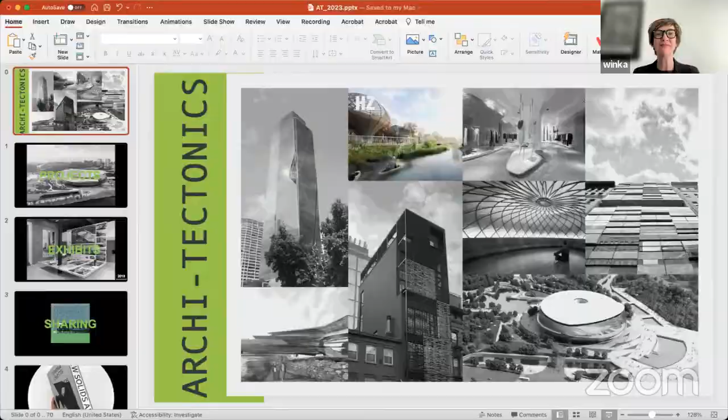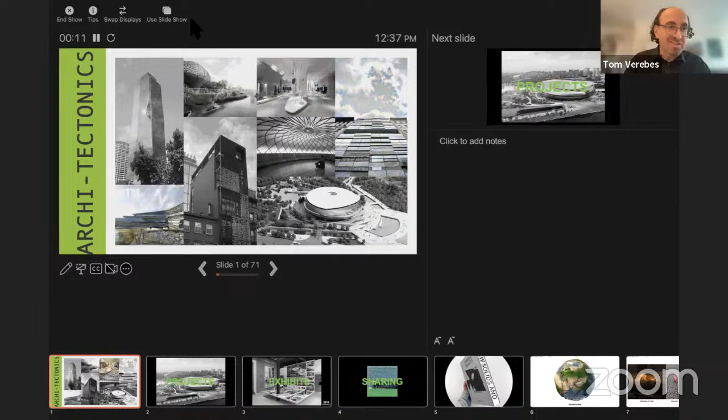My Zoom seems to think it cannot see my screen. I made you a co-host, Winka, so it shouldn't be an issue. No, it's just, I got an iWatch and it's ruling my life now, it's decided it's taking over. Let me know whether you see it full screen. Yes, we do. No, we see your notes. Probably swap displays, up on the left. Yes, okay good, thank you for that. Let me close this so I don't.

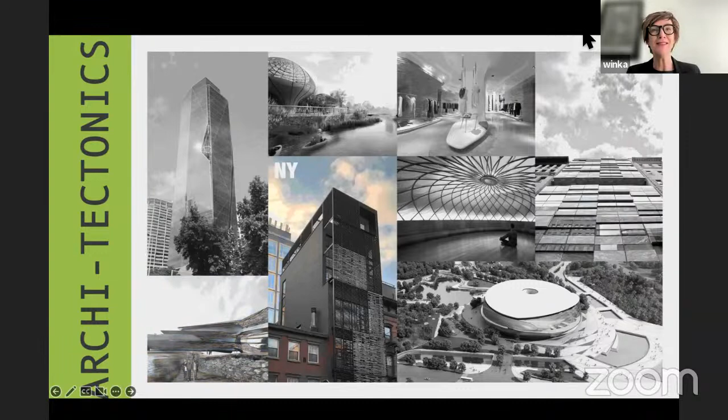Welcome, everyone. You all know offices are never just the person you see alone. There are many people involved, and over the years, many scales, many subjects, many typologies involved. As you see here, we move along scales, countries, typologies, and functions.

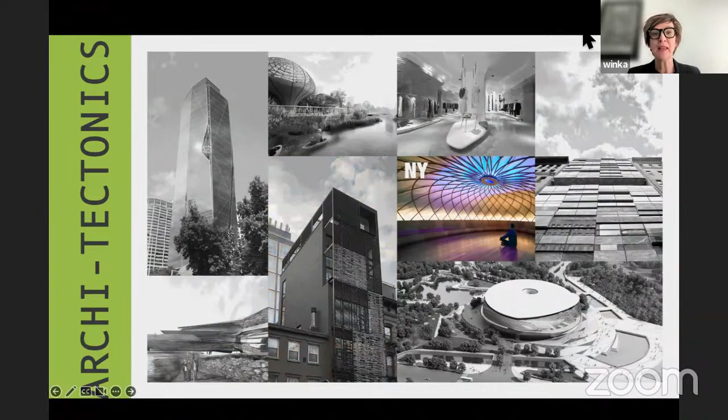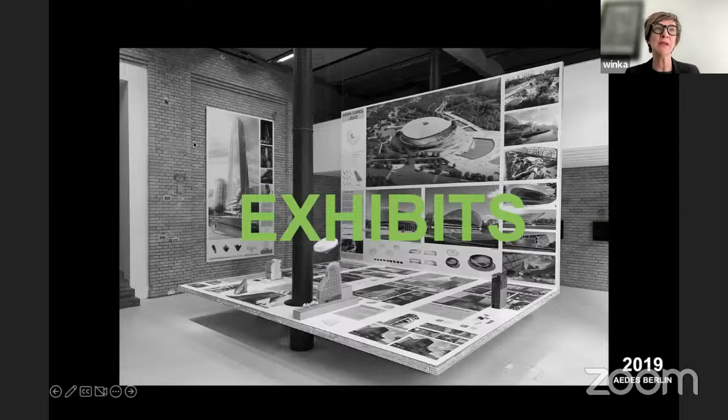Architects' lives are interesting. We go from projects to exhibitions, which means we share our ideas and we actually talk about them, make it an argument maybe.

And we share it in publications where we lay out our points and talk about it in depth. As Tom said, our latest book is Strange Objects, New Solids and Massive Things. We call it the anti-monograph. It really is a manual conceived itself as a strange object and reflects our non-standard.

Sorry, I was interrupted, but that was what I said. It is a manual, and it reflects the non-standard way we're working. Essentially, the non-standard way started very early on and was a little bit related to what we call the Anthropocene.

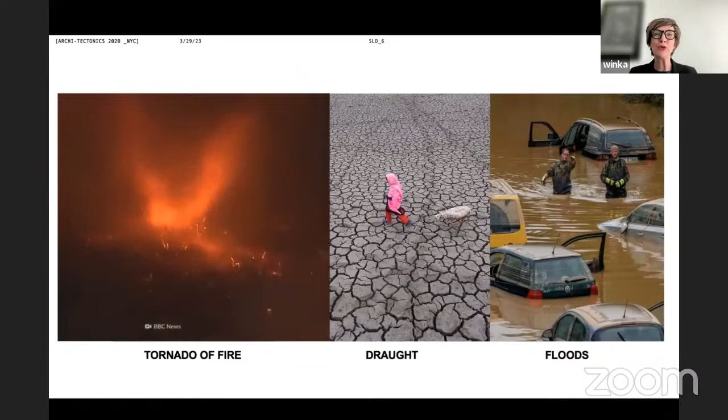The Anthropocene, as we know, has strange effects, from tornadoes of fire to droughts to floods. So why can't we control that this water travels to countries that need it and the other way around? We think partially as architects, we have a small part where we can maybe add some intelligence to this problem, thinking about buildings with smart skins, passive energy sources, prefabricating, which means it's clean and fast, and using renewable sources.

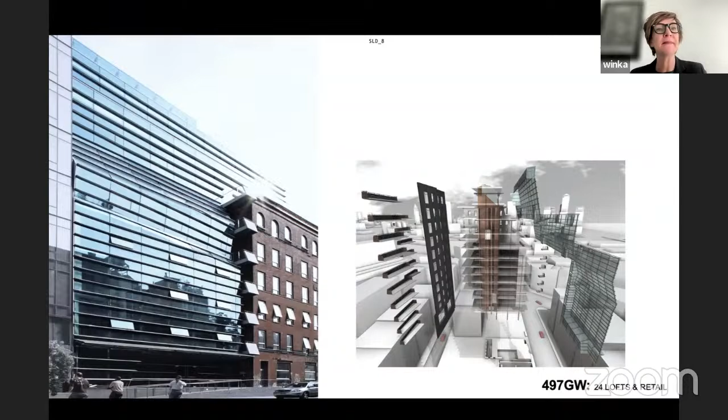So I'll walk very quickly through some earlier projects. This was a project we developed in the late 90s, built around 2000, and was maybe one of the first parametric projects where instead of construction drawings with dimensions, we sent a 3D model around with XYZ points. We did this because the glass was folded in Spain, the mullions extruded in Hong Kong, and the whole thing was unitized in Brooklyn.

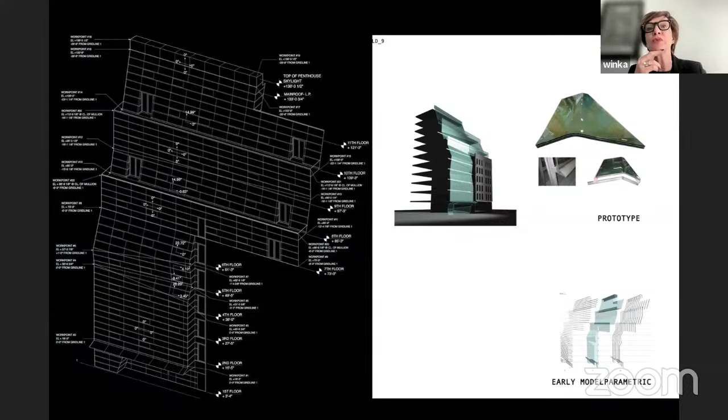Not only did we do that, we also felt like we wanted to challenge the original or standard curtain wall notion, as this was more a customized version. We separated the vertical and horizontal mullions in a way that on the outside, it doesn't look like grids, but like horizontal bands. This project was a very interesting one.

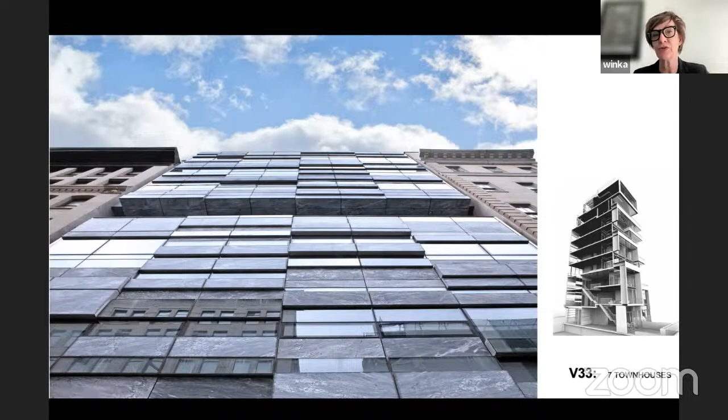And the last one was also passive solar. So this is a later one, moving into 2010. This was a pixelized facade, really responding to the fact that the building is in a landmark district, and it's stone, translucent stone, glass, and translucent glass, optimized towards the north street facade with glass and stone, and towards the south, where you have the garden with very deep balconies, which provide natural shading, and also outdoor spaces, which is rare in New York City.

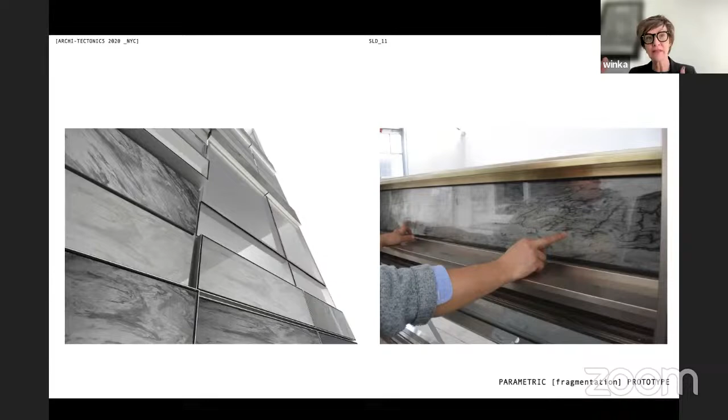This parametric facade started to show something which we have been doing from the beginning, also in the folded glass one, where we moved away from working directly with contractors. We started working directly with manufacturers, and that also meant instead of model making, we started to make one-to-one prototypes. So here we're looking at a one-to-one prototype of the facade in Italy, where the mullions are ultra thin, the stone is translucent, and the facade is a 3D pixelation. This was in response to a question of Landmark.

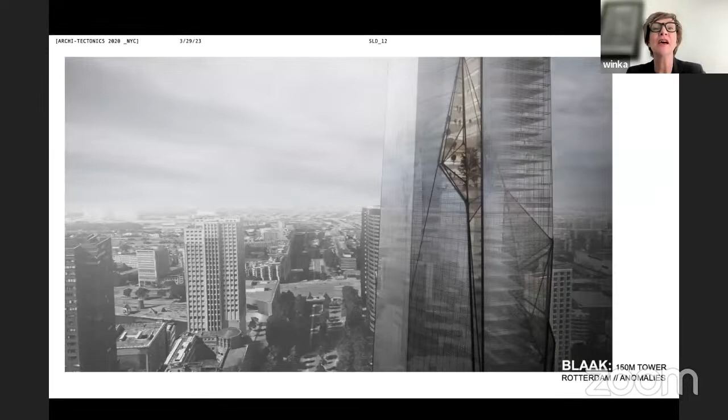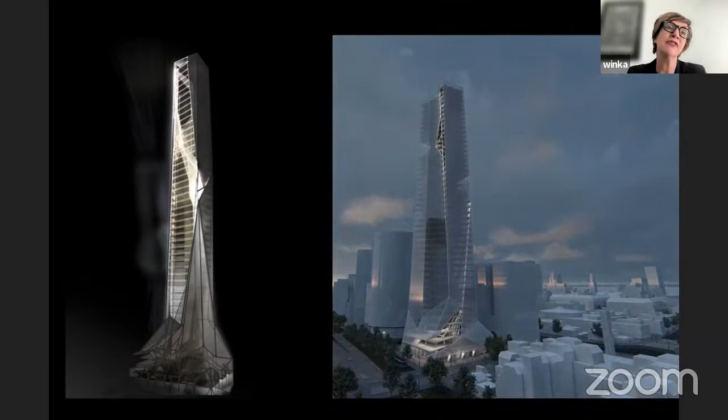Moving more towards the future, this is a tower we're working on right now in my hometown, Rotterdam, in Netherlands. A 150-meter tower, where we start to look at the idea of sky lobbies as green lungs. But not only that, the tower itself works like a solar chimney, pulling cool air at night from the lower levels and pushing hot air out. And then a frit will allow the south facades to stay cool, a silver frit on the glass, and the north facades to stay transparent.

So then we move into one we just finished, a little tiny guy. Here you can see the difference in scale that we happily embrace. Our office is not traditionally going from tiny to large, we actually like to switch the mini with the mega. And this is the mini and the mega I'll end with.

So this was actually a 4-story townhouse. We added 4 stories on top of it. I said to the office, this is starting to look very out of proportion. Maybe we need to add a 3rd building to create actually something completely new.

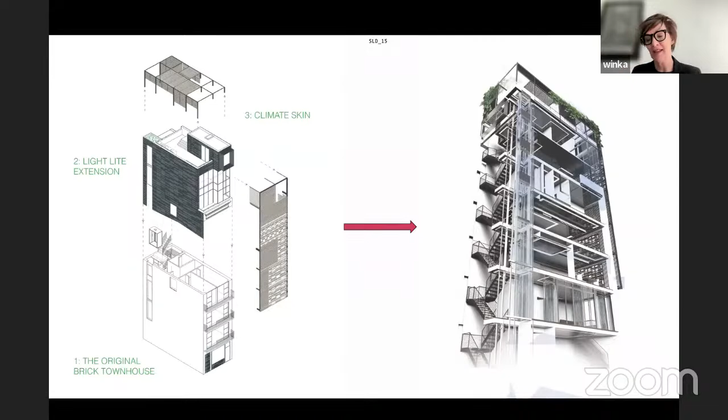This is where the climate skin came in, which is a trellis, a solar trellis volume really, not a facade but a volume, which wraps the front balconies that are leftovers from the fire escape that used to be there, and then wraps all the setbacks of the new extension and also the roof terrace and the back. In the back, as you can see on the right, is actually a glass elevator and stairs, because this 8-story townhouse is just for one family.

Here you see the front with the trellis, and that's on the right. You can see it's openable. And that opening we felt should be a transformation.

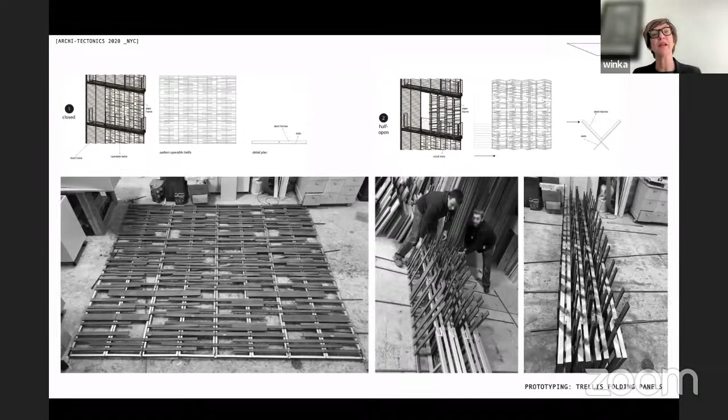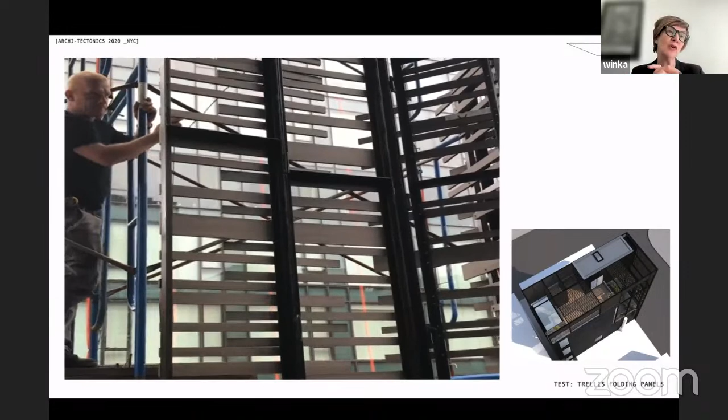So we call it feathering. It's basically inspired by a bird wing, where if the bird flies, the feathers are completely aligned and very streamlined, but then as it sits down or lands, the feathers get spread out. So we did the same thing here. As the trellis is closed, the fins move flat in space, but as it opens, it folds out. And here we're actually using an actuator to see whether we could automate the top levels.

Here you see a small close-up of how this looks for the facade, and you see the balconies. Quite beautiful is that this facade actually saves 45% energy reduction over the year, simply by opening the trellis in the winter and allowing passive solar in, and by closing it for shading in the summer and not overheating the building.

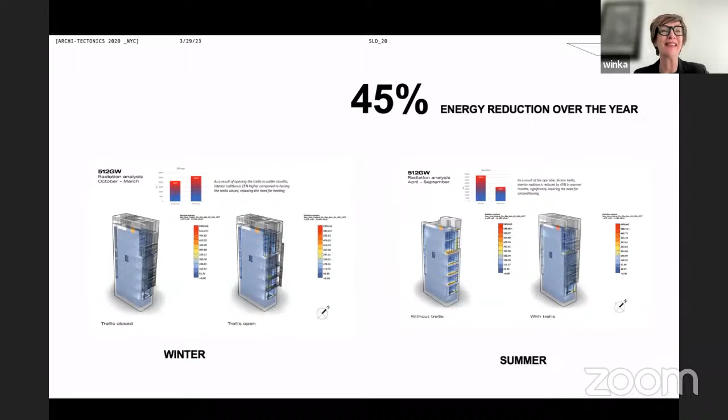A very energy efficient method, as in not using any energy. And then if we're up in the extension, you start to see the doubling of the facade.

So going back to the Anthropocene, when we look at the climate as it is now, nearly 50% of the US population, an estimated 150 million people, live in areas that don't meet federal air qualities. Particulate matter is single-handedly responsible for up to 30,000 premature deaths every year. According to the latest World Health Organization report, 8 million people die every year globally because of air pollution.

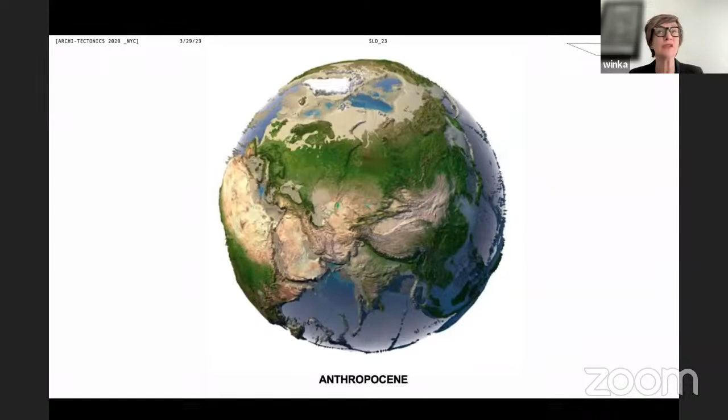Basically, radical mutants, or hopeful monsters, as they're called by geneticist Richard Goldschmidt, which he relates to evolutionary biology, means that these flowers undergo fasciation or cresting, a relatively rare condition of abnormal growth in vascular plants in which the growing tip, which normally is concentrated—as you know, a flower is typically symmetrical—starts to produce this cylindrical tissue, elongated in the direction of growth, creating these flattened ribbon-like crested or elaborately contorted tissues.

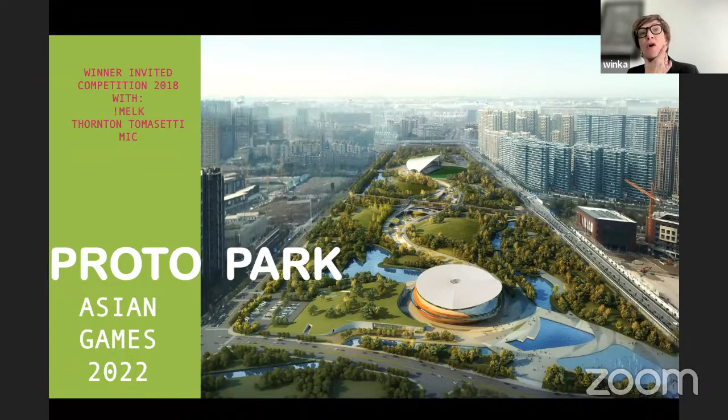We call it the proto park, because we don't see the park here as a park for the Asian Games. You have to think the Asian Games are the Olympics in Asia. This 116-acre park is 1.6 kilometers, almost a mile long, and as you can see here, has 2 stadiums.

Now, there's a few interesting things we did to change the dynamics of making a stadium. As you know, a stadium is usually kind of a white elephant in the city. It is really active for a very short amount of time, causes traffic jams, massive overload on the neighborhood, but then it stops for most of the year. So we proposed to the client to actually look at both the park and the buildings as something that would have use after the games.

We were, of course, a bit opportunistic here because we were interested in making more interesting buildings than just a stadium that is a bit of a one-liner, in the sense what you see on the outside is what you get on the inside. So here you see the evolution of our thinking of the park.

This master plan was co-designed with Melk, a landscape architect here in New York City. On the left is what they asked. We broke the rules. They asked to put the two stadiums on the bisecting road and river in the middle.

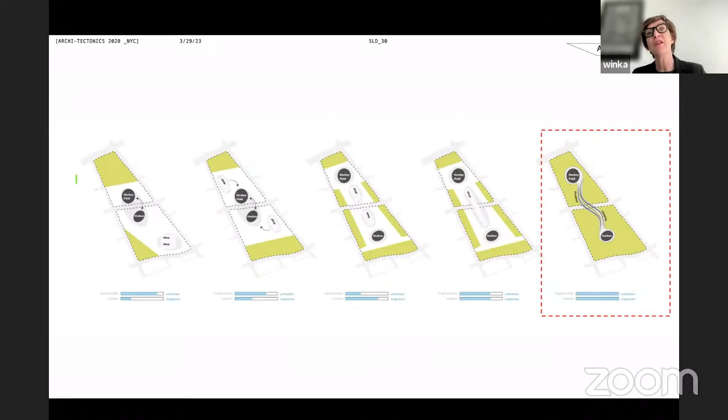We realized if you do that, then the park becomes the backyard, so we proposed to put the stadiums in the centers of each half of the parks, allowing these to be connected by what we call a valley, a shopping valley, or the valley village - a 530-meter long shopping corridor that goes under the river, now an aqueduct locally, and under the road, in order to connect the two stadiums as one kind of activity network.

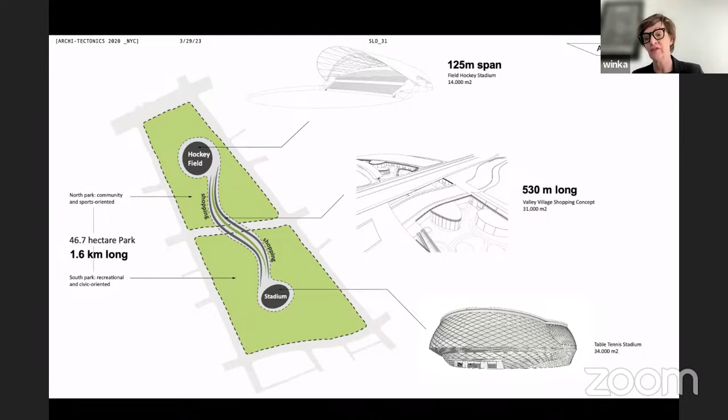Also, that artery would be the activator of the park long after the Asian Games are gone. On the top, you see the field hockey stadium with a spectacular 125-meter span wing, just a solar wing, and the table tennis stadium that is a hybrid as concert hall of 34,000 square meters, which is about 350,000 square feet. Here you see how this looks now.

It's extremely green already. As you can see, the aqueduct is in play, and we have these long loopy pedestrian bridges going over the river and the road as well. The road, as you can see, is actually quite a large road - a 6-lane highway, which in China is quite normal. We're in the center of the city, but they tend to have really large roads.

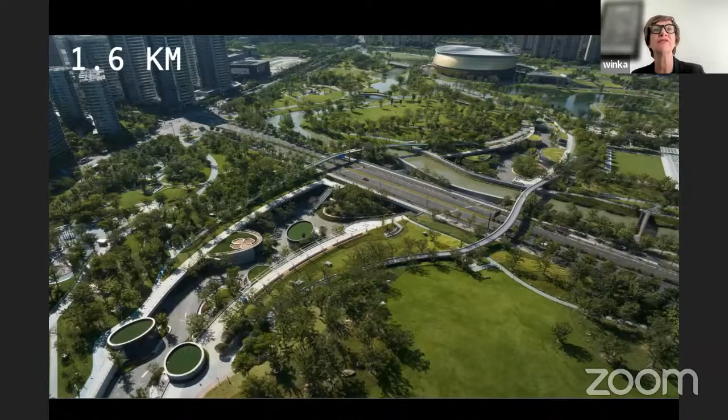And the shopping valley, as you can see, has these pavilions with green roofs and solar wings that give the solar energy for the valley village, so it's always lit.

Now, the park itself we developed as an eco-landscape with bioswales. We reconfigured the wetlands that had almost completely disappeared in the area, and we use only perforated pavement so that the hardening of the city around is absorbed here. The water is absorbed here and also retained for the future, so that there will be water when it's seriously dry around.

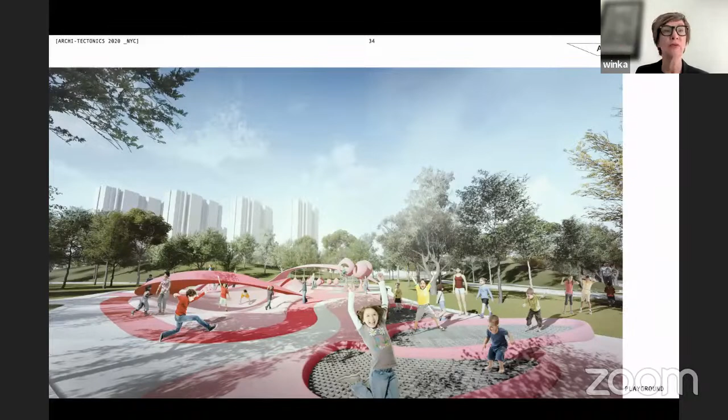And of course, because it is a park for the future, it has playgrounds, outdoor arenas, sport fields, and all kinds of other things. As you can see here, people are actually currently camping in it. It was quite a lovely set of social media images - if you go on Chinese social media, it's quite hilarious to see what people are currently doing in that park.

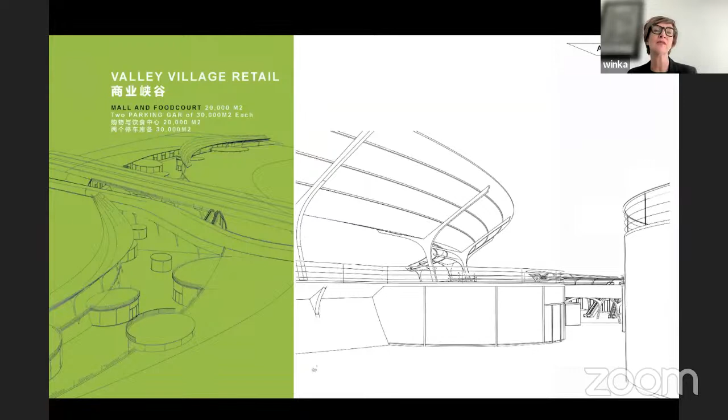Here you see a little bit of the structure of the solar awning and how it connects to the lower pavilions. We also used another sustainable method called the zero earth strategy. It's a very simple method: when you excavate the wetlands for the new valley village, rather than removing the earth, we leave it on site.

One thing I didn't mention is that it's not just two stadiums and a valley village. There's also two parking garages, a visitor center, and a fitness center. So it's actually seven buildings and a park.

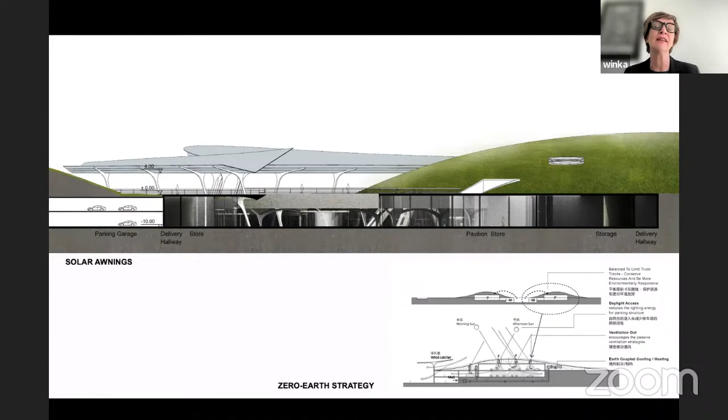Sometimes we have hills up to 20 meters, 60 feet high. But in the hills, you'll find little skylights to allow for natural light and ventilation in the parking garages, and also for the fitness centers.

It's rare in China that this happens. I've been thinking about why. I think one reason was that we proposed hybrid buildings designed for the future, so we were allowed to invest more money. The second reason was time pressure—they just didn't have time to change our drawings. They had to build exactly what was on the drawings, which is also funny, because I drew a curved line following the river as it naturally went, for lack of time, and they actually literally built a curved aqueduct. So that was a bit of a surprise, as you can imagine.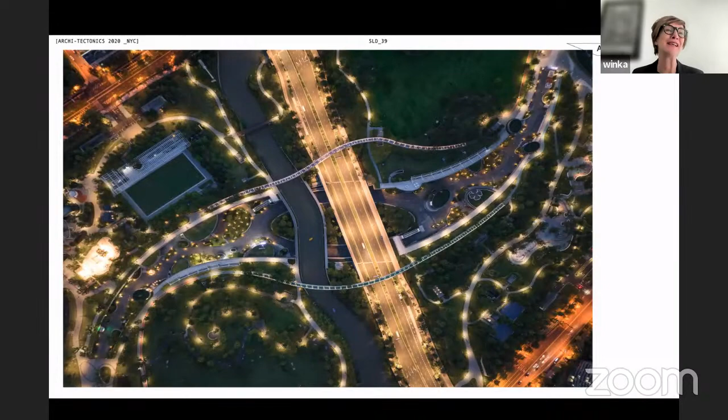And then here we're down in the Valley Village. We have not escaped the Starbucks—it has landed here already, and it is majorly used already.

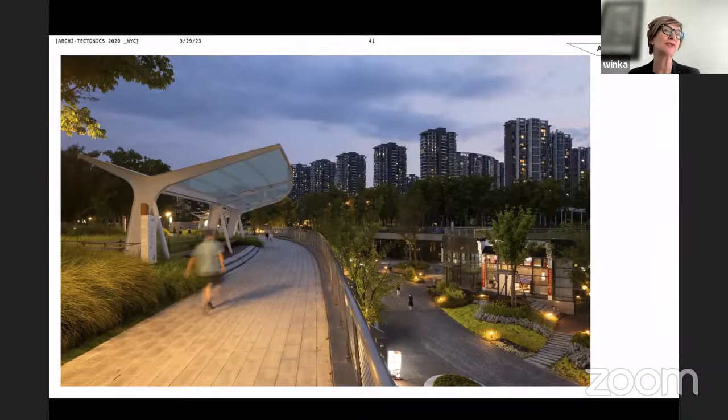Now we're on the higher level, looking at the solar wing as it is starting to collect energy. It's a solar film, so it's also slightly translucent.

So the stadium design, as I said, is a field hockey stadium, outdoor. We decided, as everything is hybrid, to make this building more of a topological or topographical landscape feature by recessing the field in an oval five meters deep into the site where the seating is, then tilting the landscape up around it so that at the other end it's actually flush with the path.

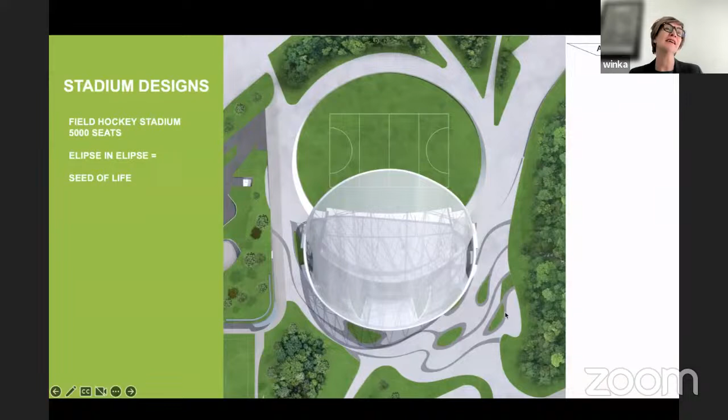It's a 5,000 seat arena. This ellipse-in-ellipse, as you can see in the roof and the arena, is called an ancient diagram—the seed of life—which is kind of nice to know.

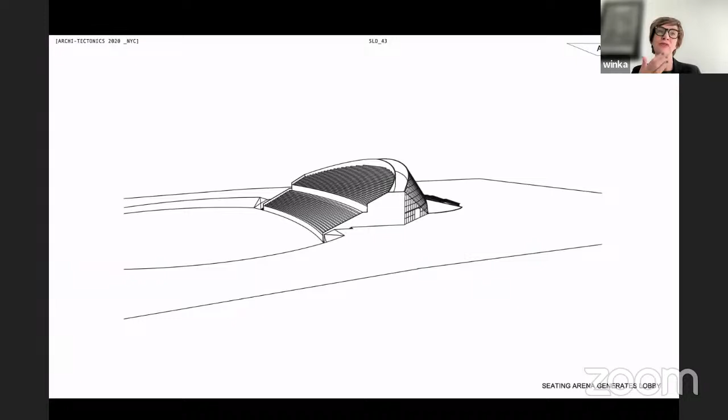The building is a very simple design. We curved the arena for better viewing angles, and the area under the arena really became the lobby, and we curved the facade with that. Then it's covered, as I said, by this enormous wing spanning 125 meters in one span with one truss, with a very light fabric on top of it.

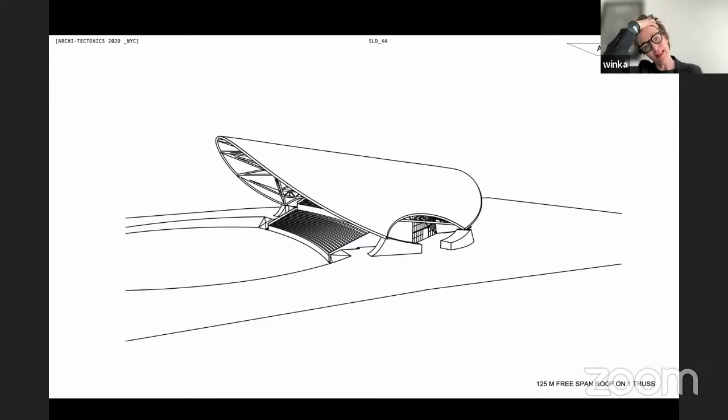What's actually interesting is that rather than worrying about the structure of it, we had to worry about it not flying off. So these concrete abutments you see here are really to hold the thing in place rather than having it fly off.

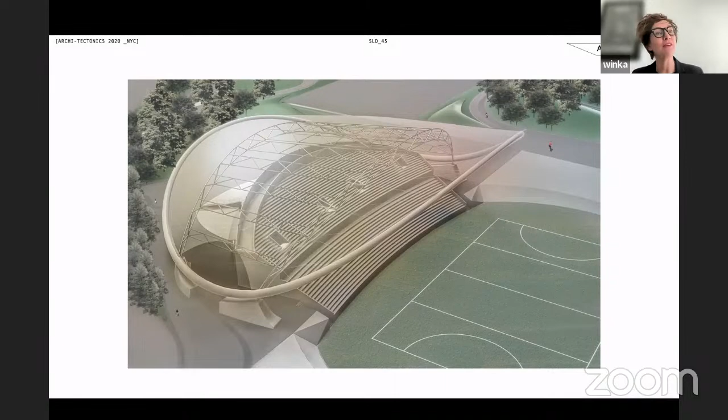As I wanted mostly cables in this roof, the engineer explained I had to put a tension ring around it. At first they said I might not want that, because the ring goes from 1.5 meters to 1 meter diameter—5 feet to about 3.5 feet—which sounds enormous. But when we drew it, because it's almost 400 feet long, it turned out to be perfect in proportion. So we said, go right ahead, we love the ring, let's do the ring.

Here you see the roof at night with the lobby.

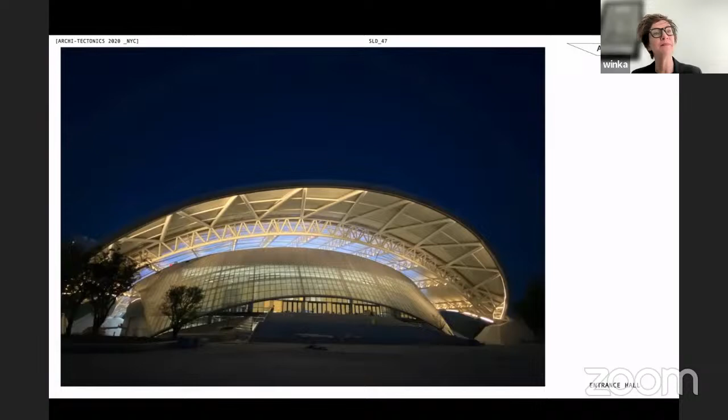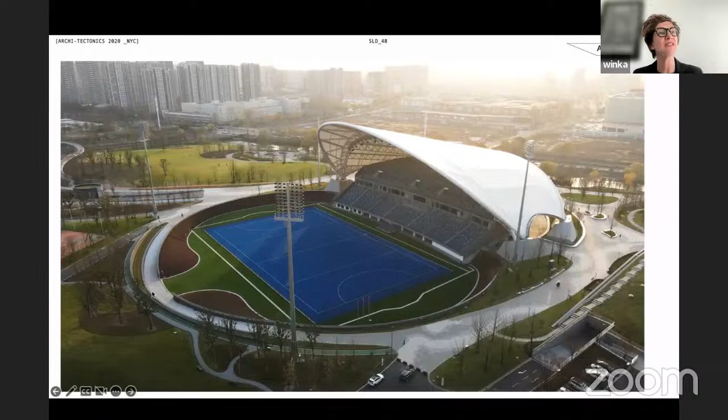And this another social media photo, which stunned me, because in my head, you know how you draw things - this is interesting when you're a student, you draw things from above, you draw them from pedestrian level, but somehow it never occurs to you how big a structure is. And it only became very apparent in this photo when you see the tiny people.

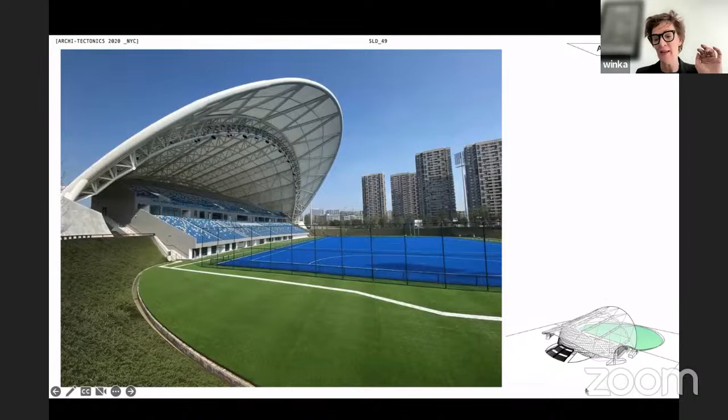In my head, these concrete things that you saw here, these little guys at the foot of the wing had become kind of in my height, 6-7 feet. And as you can see here, they're incredibly much higher. So I look forward to going. And then on the bottom right here, you see the pedestrian bridge flying by.

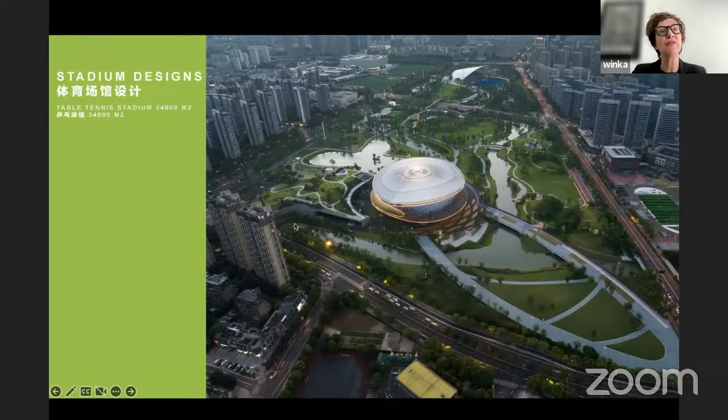The other stadium is the one here in the front. It's the hybrid between concert hall and a stadium, and behind it is actually the fitness center that is connected to it underground. And you can see why this park looked completely green in that first photo - it's because all the buildings that are either the fitness center, parking, or visitor center and the other parking are all under the landscape. So there's literally something like 1.5 meters of earth on top of it so that trees can grow. And only slivers of glass are apparent at some points and hop out of the landscape.

So how did we think of this shape? When we realized we wanted to make it not a singular shape, but something more mutant that reacted to the stresses of the environment and the stresses of having to be a hybrid, we were of course kind of inspired by the flowers and the changing of the essence of the shape. But we also looked a little bit at this thing called the cong, which is an artifact that you find in ancient graves that is traditionally revered as quite important.

So we started literally with looking at a square shape intersecting with an oval, but then we realized we wanted to have it more self-similar. So we made it in the end like two intersecting ovals that were slightly offset also, to really allow the mutant character to incorporate not only intersections on the inside, but to also allow exterior spaces to appear.

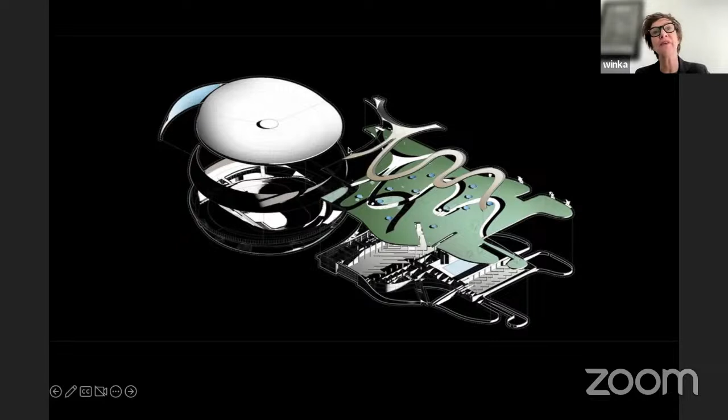So here you see the fitness center as it sits next to the stadium. It's actually kind of one building in a weird way, as in the practice areas are there. And what was also really important for this hybrid is that it was super adaptable. We made it super adaptable by introducing something called the suspendome, which means it's a roof that has an extreme height in the middle and then self-spans itself to the inner walls and cantilevers out to the outer bowl.

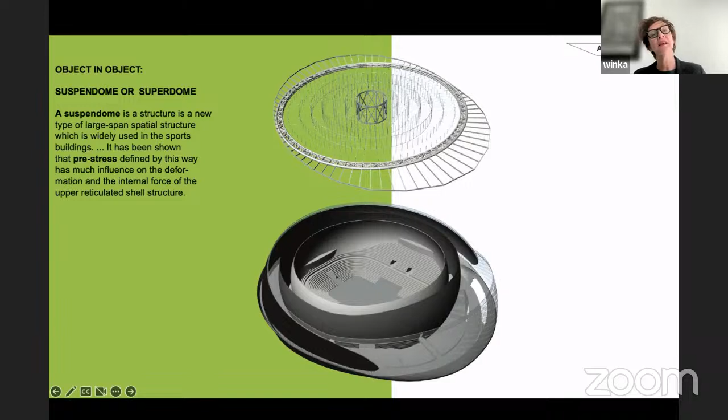So this is a cantilever, and that carries one of the rings. So the two rings of these intersections was a closed facade clad in brass shingles, and then a glass diagrid facade, steel and glass - that was the other circle.

So here we are kind of in foundation phase. We are on site looking at the projects. What was really interesting is that we had to actually take a car to drive from one project to another. We saw the buildings in several visits till about halfway up, and then COVID hit.

Here we are. So what was amazing about COVID is that the BIM guy from the contractor contacted us - this is the guy here in the middle. And he had found that he really loved the buildings and had never seen anything like it, and was trying to understand it and had some questions. And basically around his boss, I think, contacted us.

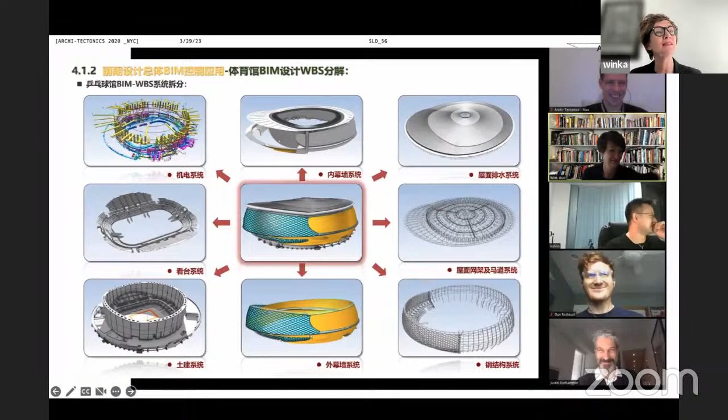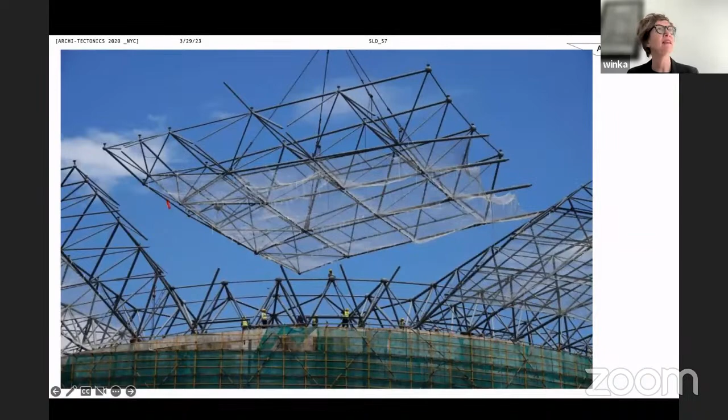And so we had these meetings with him discussing how to make this intersection of the two volumes, how to create the suspendome, which is essentially a radial grid, and how to intersect all structures and mechanical in there. He also helped to prefab the whole thing. So this whole roof of essentially a 350,000 square foot building is lifted in place in only, I think, 8 or 9 chunks like this. And then with tiny little cranes held up in the air while they're being connected.

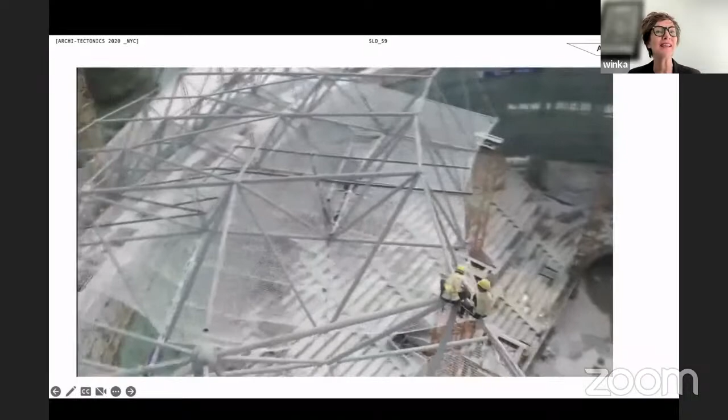And I have this little movie I wanted to share with you, because the way they did that was quite stunning to us. In there they are lifted in the air, but then you see these people literally connecting the dots, as they say, locally at these points.

Thornton Tomasetti was our engineer who helped us think through these things, but it also rendered the building completely column-free. So the column-free being important for the flexibility.

The diagrid, we were helped by a very famous engineer in New York City called Israel Berger, Bill Logan. He's a sailor. It's my favorite engineer because he thinks dynamically.

And I asked him, I want to keep this diagrid planar, because one, I don't want to make this double curved building super expensive. Two, I think it's more interesting to give the double curved facade a lot of texture, because what started to happen is that the calculations of the brass shingles that we also optimized, I think 5,000 pieces only in 85 different shapes through parametric design.

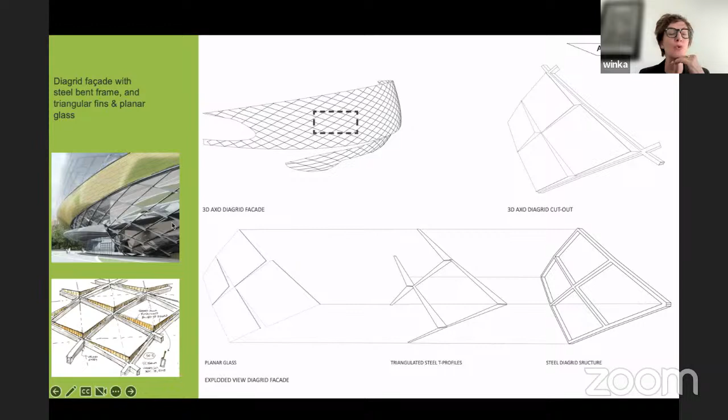We also wanted to have the glass facade have a lot of texture. So we kept the glass planar, but then designed little silver eyelets, triangulated steel profiles that support the glass, which gives the facade quite a bit of texture. Because it's so large, these are very small eyelets, but the nice thing is they light up when the sun hits them, so they have a really beautiful shimmer in the facade, and it's very 3D.

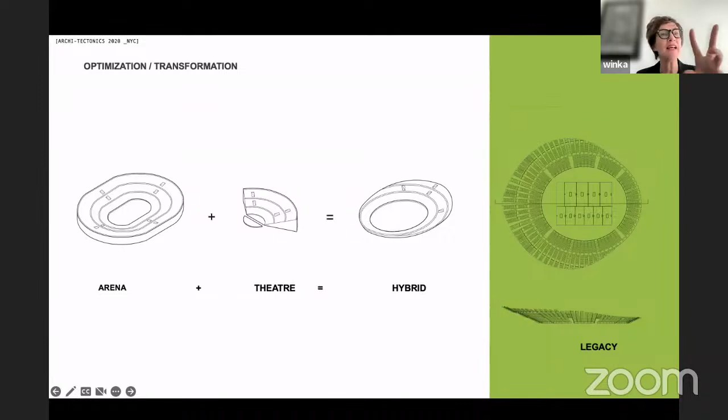Of course, the hybrid nature also had to happen on the inside. So we looked at arena seating, theater seating, and made a hybrid for it, that we then developed under this suspended dome.

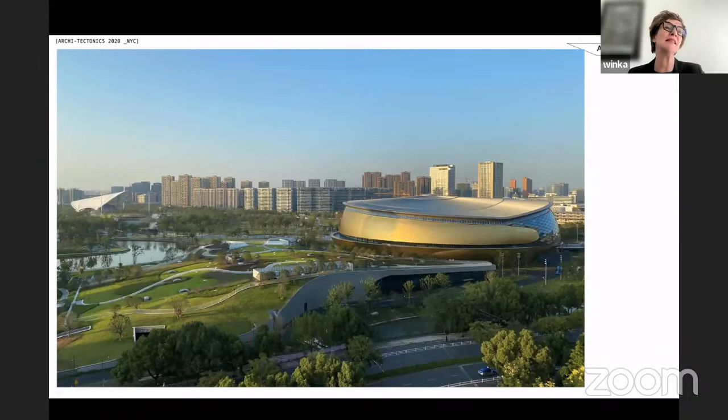And then, of course, this is incredible - our photographer took this photo where they're on the fitness center, and this landscaper is keeping up with the grass and the trees, but it feels like you're almost in the middle of nature. So it's really funny to think that right below you is a gigantic fitness center with several Olympic-sized pools.

So yeah, the book, as you heard, is out. It came out the end of '21. Manuel de Landa was so kind to write a really great text on it. So as I said, it's a manual - it really describes why we think you can innovate in architecture by working through manufacturing and prototyping rather than presentation models and working only with the contractor.